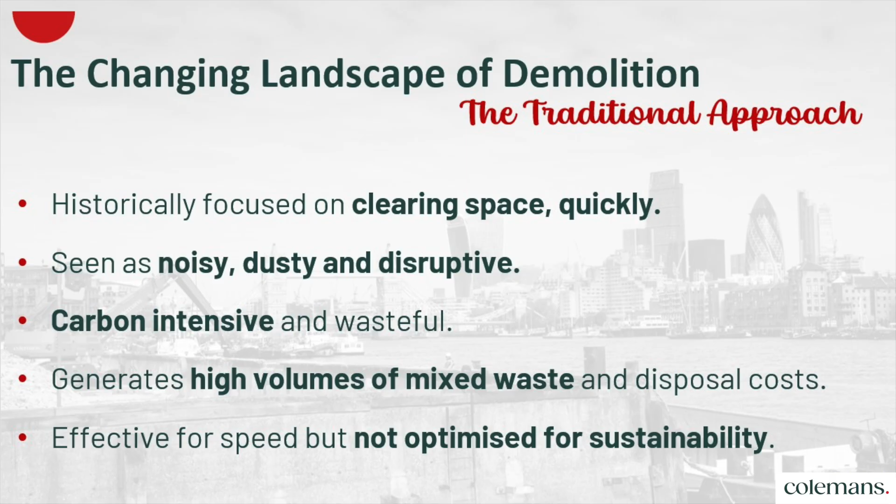Lots of companies are under pressure in terms of their ESG goals and to reduce the embodied carbon. It's true that this is relatively new, and therefore a lot of companies, including ourselves, are struggling and find it difficult to understand how we can actually have an impact. So we're hoping that our experience will help people understand that and give them support through this journey.

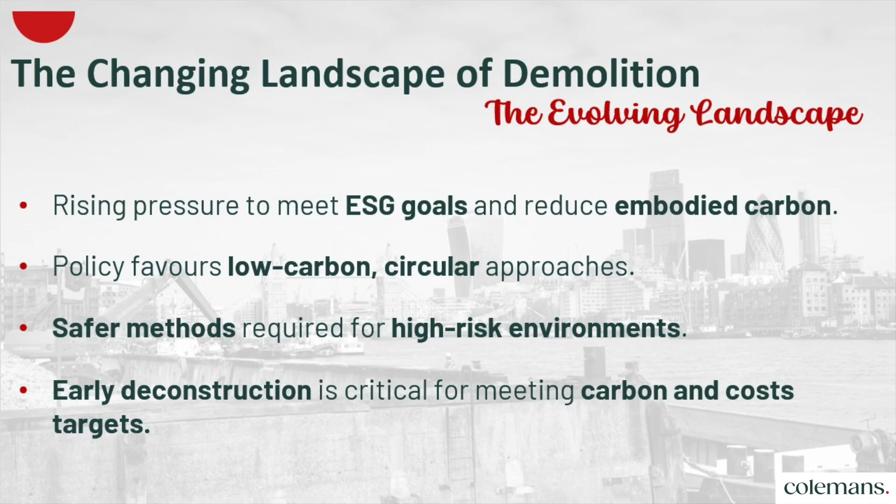So why is it important? It used to be health and safety that was agenda item number one. We now see virtually every meeting that we have, it's about the environment. A lot of the waste comes from the construction industry, and within the construction industry, 30 or 40% of those emissions come from the energy that's required to produce steel, concrete and cement.

So why must the industry change? Construction generates the most waste. It's the largest waste stream by weight. Recycling is great, and we've come a long way, but it means that we lose the value of the materials as they are. The scrapping of materials and the recycling of materials destroys the embodied carbon. Reusing the material significantly saves that carbon and allows it to be introduced into the new construction effectively.

So last year, our past president for the CIOB was focused on the United Nations Sustainable Development Goals and the impact that our culture has on the environment. And this is a global initiative where we are focused together on how we can help our environment, the people that we live with, to provide a safer and more healthy way to live our lives.

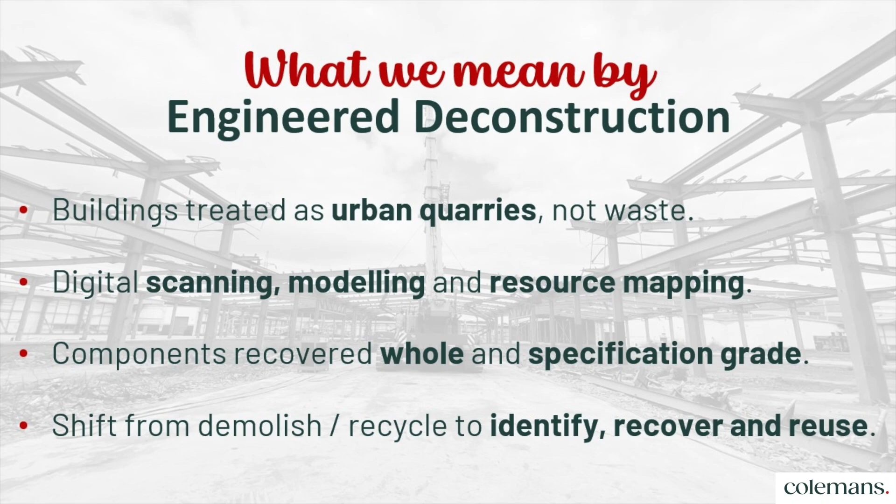In doing so, because it's an engineer-led focus, what we find is that the safety and quality of the outcome before, during and after is of a far higher standard than what we've historically been used to. We get more value out of the materials and therefore save project costs, and we're able to introduce innovation and technology into our processes and procedures.

So unlocking the value, particularly with steel, which is the focus here, historically we scrap material, we cut it into short lengths, we load it onto trucks, it goes to a port, gets shipped abroad, smelted down, reprocessed and brought back. That is hugely energy wasteful. It's not smart, and there are better ways of working.

And having said that, this is not a new thing for the demolition industry, but it is something that lost its focus and is now something that we're trying to bring back in and get people to focus on. It allows us to de-risk the projects because it's an engineering-led process. We're able to actually assess what we're doing and have good collaboration amongst the design team.

And as I said, the operational efficiency, we found that the work is better planned, it's slicker, and the program is more deliverable, and the objectives and the outcomes are closer matched. We always get asked, okay, what impact does this have? We do need to be involved a lot earlier in the process. We find that if we're not, the steel doesn't fit the design, it may be too big. There has to be early engagement.

We need to have visibility of what the outcome is, what the requirements are for the project, so we can match what the steel work is going to be, but there needs to be a bit of flexibility because some of that steel work may actually influence the design. We look to inform the planning process and the procurement and deliver within the sustainability strategy. Keep repeating this point. This is one of the most important points about early engagement. If we're not involved early, we lose the potential to add this value.

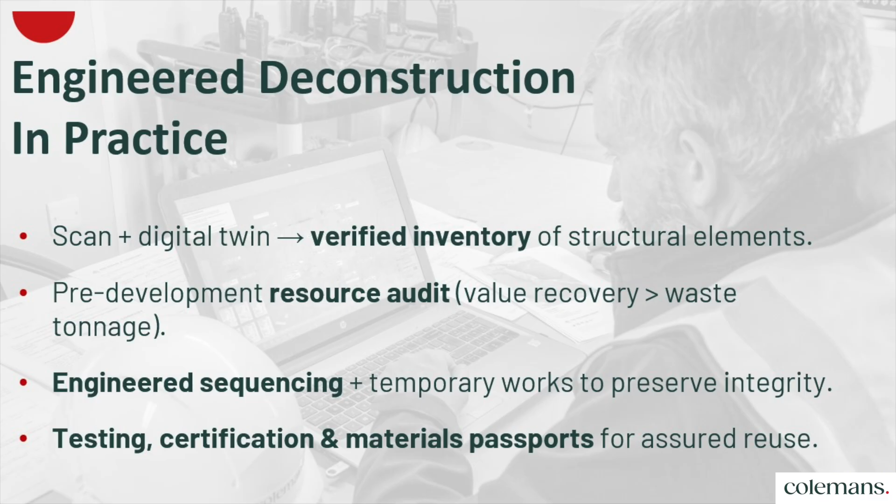This then leads to our engineering team having an engineered sequence on how this building, structure or facility can be deconstructed. And then these materials, once we've taken them down, go into a rigorous process of testing, recertification, and then we have a material passport that follows that.

At the back of this, our business is Emerald Steel, which is a low carbon structural steel initiative we've brought into the business to support our client. Just recently at one of our projects, we've been able to dismantle a large portal frame building and save a good amount of steel from that building. And we were able to hand that over to the client, which then went into the new build.

Just like Mark has said, the key thing for this process of engineered deconstruction, which we are talking about today, is early engagement. This gives us the opportunity to engage and collaborate with the design team to bring these materials into their plan. It also helps us, for instance, with the steels. If what we've had through our inventory is not able to fit into the design, there is ample opportunity to look at the steel members, and the design engineers can then see how this can fit.

We then have the digital mapping system through 3D scanning and point cloud evaluation, which helps us transform this scanning data into a 3D drawing. What the 3D drawing does, which I'm going to talk about in the next slide, is give a clear representation of what the building is. We are then able to identify on these drawings what material or what steel is suitable for reuse.

And then we get all this data together, prepare an inventory or steel takeoff, which we then issue to the client. This is then verified through the British Standard steels data sheet to make sure that all the steels we've taken down or identified in that building meet the standard.

On this slide, you can see there is a physical verification of every material that comes down from the building. On the top right-hand side, that is an in situ hardness testing, which we have to do on every material just to make sure it meets the standard.

In terms of storage, when we've taken this down, we've put the materials in such a way that we do not tamper with the material's integrity. You could imagine a situation where steels are being moved about the job, with damage to the flanges or to the web, but through our sequencing and engineering planning, we've been able to make sure that these materials are stored properly.

This is a typical example of the point cloud data that we get from digital scanning. Like I said, this then transforms into software like Revit. We are then able to produce a 3D model drawing that identifies what steel is there, what section sizes, the profiles. We also put up color codes just to make things easy and presentable.

Like what you see now, the green color shows this steel is salvageable or reusable. And then this transmits to the guys on site, who look at this and are able to identify it physically on the job.

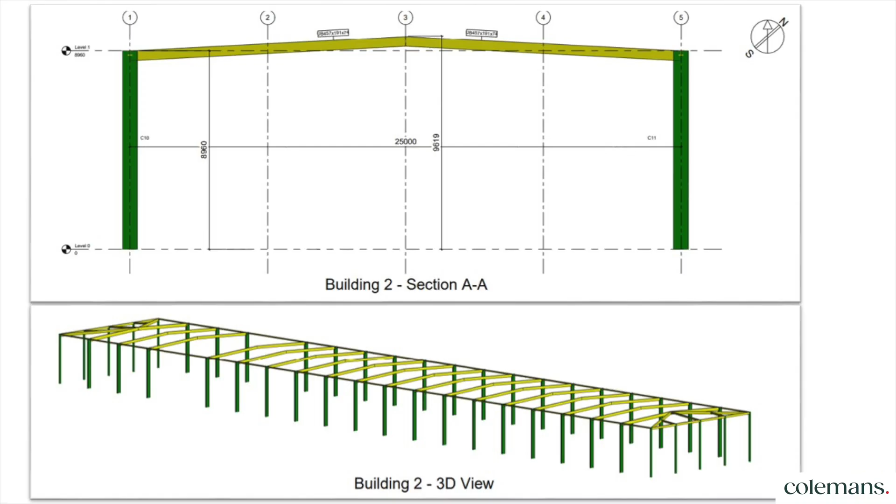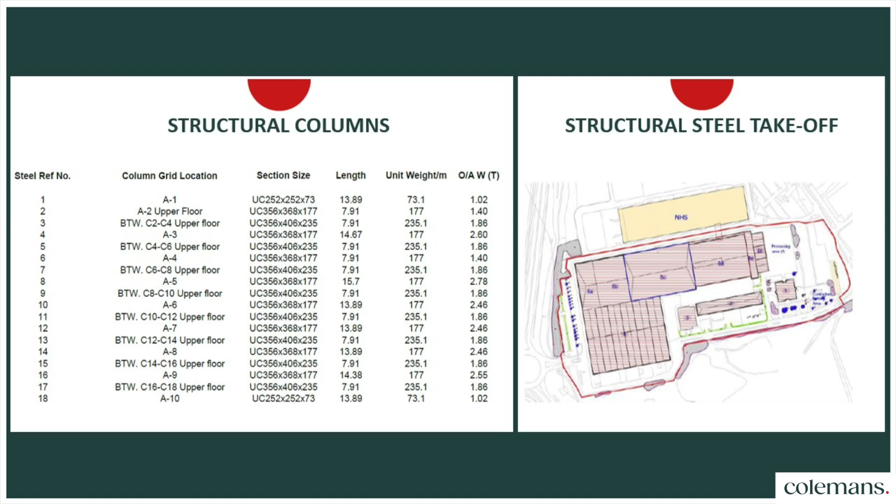This is also a typical example of the inventory or the stock we take from careful scanning and modeling. We then produce all this, and like I said, it forms part of the material passport at the end of the job, which we then hand over to the client or whoever we are working with.

So from a carbon lens perspective, we are all aware producing new steel or virgin steel represents the highest embodied carbon. Recycling then drops down a bit, but if you look at the process of recycling, it's still energy intensive, which is not the best. But when you look at reuse, it is a more sustainable path to take.

So this takes off remelting that material or steel, remanufacturing it, and then it reduces the transport emissions. For us, one of the things that we've tried to consider in terms of transport, so across the country, we have hubs close to where we work, so we don't necessarily have to transport these materials long distance. So we try to make sure all that fits into the carbon reduction we are talking about. So materials are then moved into hubs not far from the job, and that reduces, when you've done the carbon accounting, that data of carbon emission.

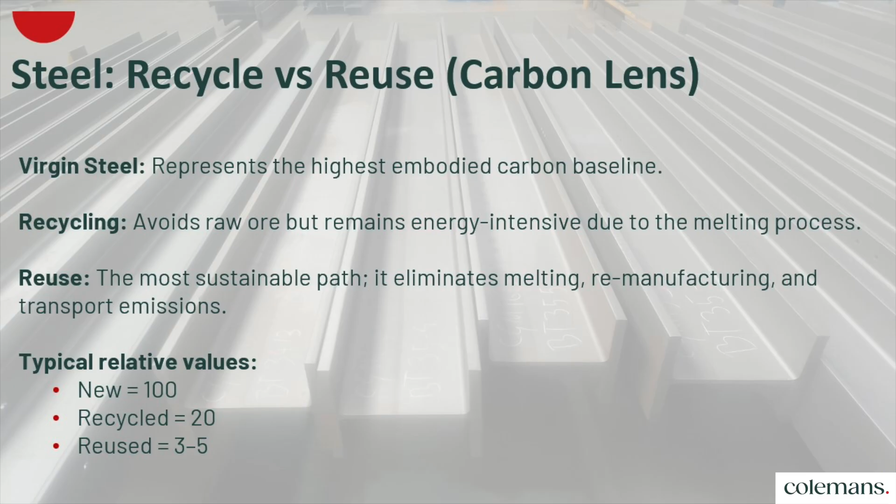Thank you. So this is the project I was talking about earlier. It was a 90,000 square meter portal-frame building in South Wales, which we deconstructed for one of our clients. We had 3D scanning done on that job, and that then produced the BIM models, 3D modeling for our client. And with this model, we were able to assess 4,500 tons of structural steels, which were physically identified on the job for reuse.

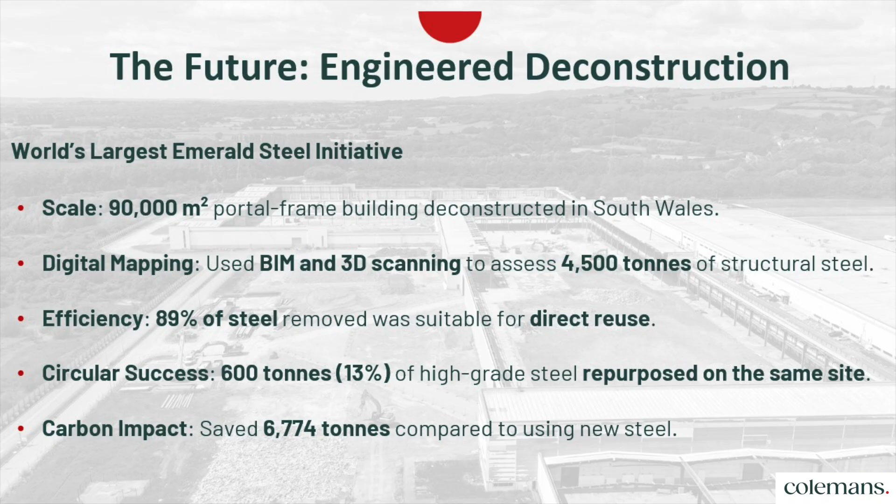In terms of efficiency, 89% of these steels were removed, taken off site, refabricated, and then put back into the building for reuse. 600 tons were clearly repurposed for the new build. And that way we were able to save about 6,700 tons of carbon compared to using new steels on the job. So comparing traditional demolition with deconstruction, the bigger picture is embodied carbon savings. So the true value of deconstruction is found in the reuse of structural materials.

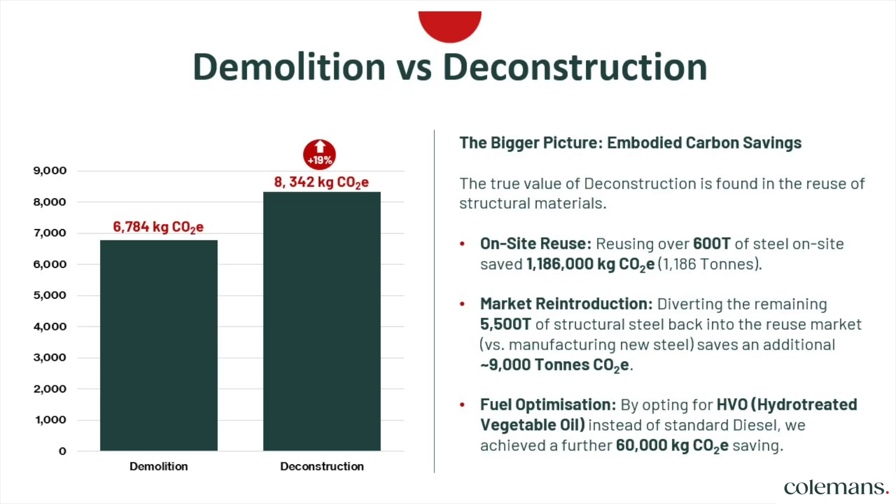Just taking a cue from the job I've just talked about, on site, we were able to reuse over 600 tons of steels. And from that same job, we reintroduced over 5,000 tons of structural steel into the market through our supply chain and different stakeholders we work with. And that was an additional 9,000 tons of carbon saving. And through fuel optimization across our fleet as a business, by opting for HVOs instead of standard diesel, we've been able to achieve about 60 tons of carbon saving from that as well. So you could see we are not just talking about engineered deconstruction, but we've tried to bring that as a core practice in our business.

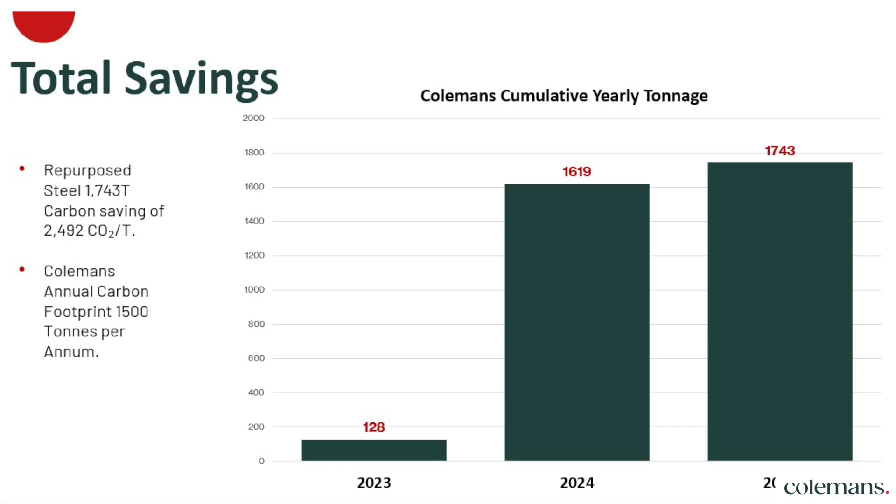So the embodied carbon savings per ton, as we all know, for virgin steel is about 1.9 tons. For recycled steels it's 1.5. But if you look at repurposed, that has dropped drastically. So it's an average of about 0.07 tons of embodied carbon for repurposed steel.

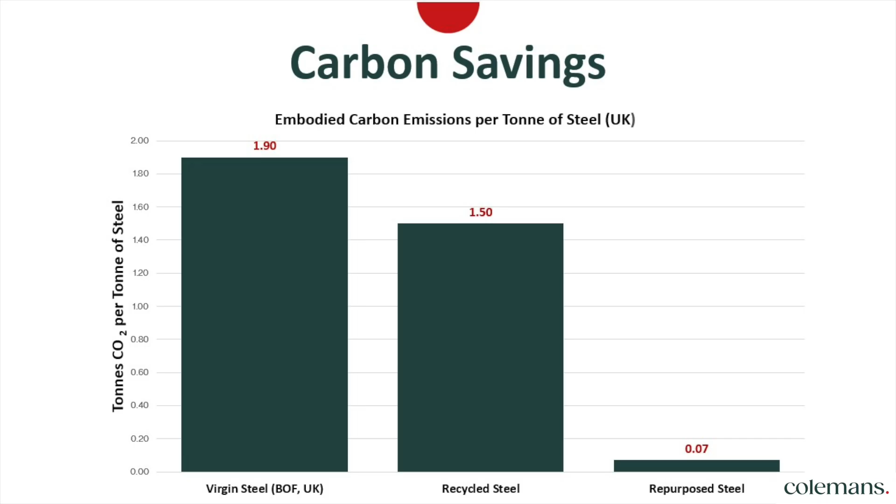So the key success for us, practically, for this scheme for Emerald Steel and deconstruction is early involvement. Mark has said that before, and this is key. It is vital. It is critical. Early involvement is essential to engineering reuse of materials. If we need to have that efficiency, we have to be involved at the start of the job.

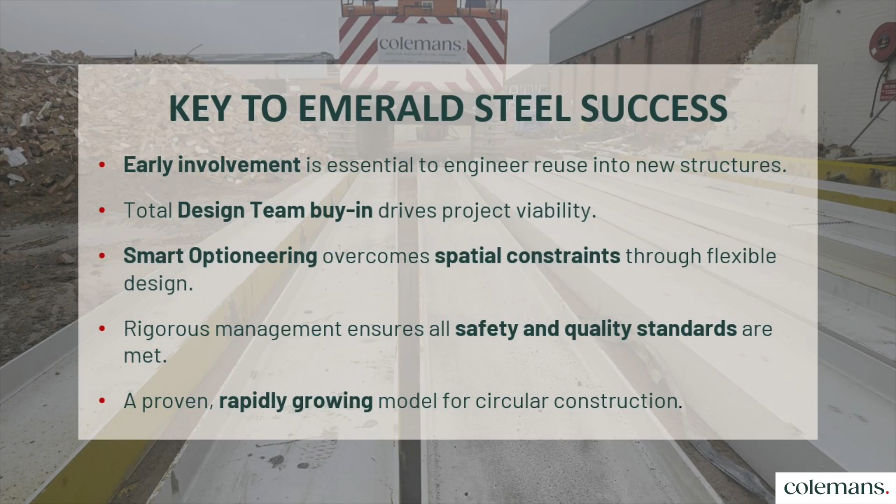That would then lead to the design team buying into the idea or the plan, because most of the time you could have people sitting back to say, is this viable? Can we go on? But when we get involved from the start, that gives everyone in the room ample opportunities to talk about this, look at the benefits and how we can get things moving forward. Talking about designs, technologies, we've used different technologies to make sure that we get the right data. Rigorous management of these processes will ensure safety and quality standards as well. And this will also lead to a rapid and proven model for circular construction within our industry. So the video you're about to watch is a high-level summary of this project I'm talking about.

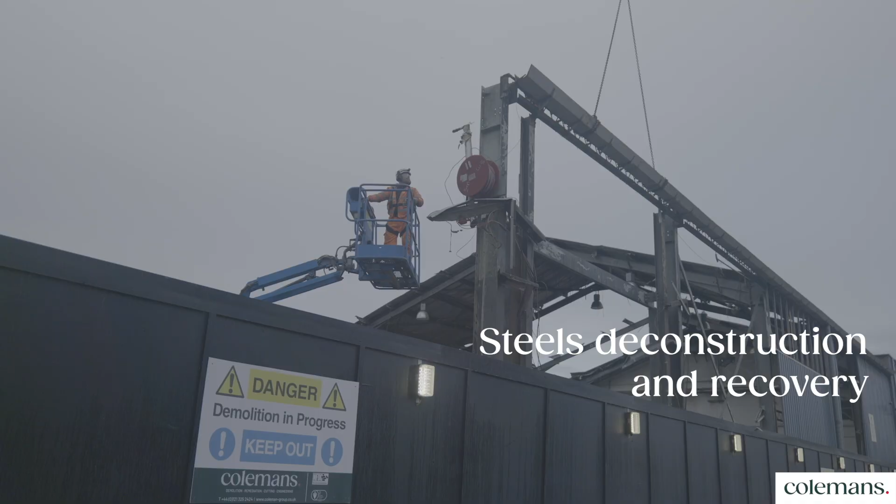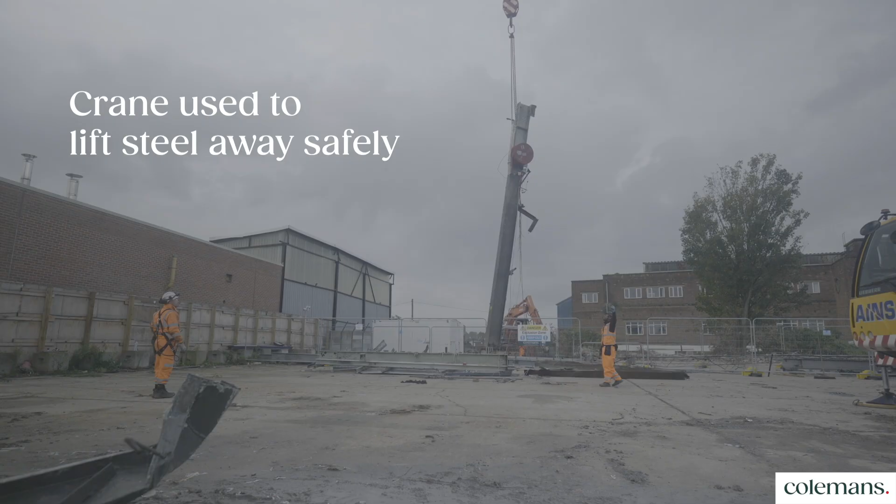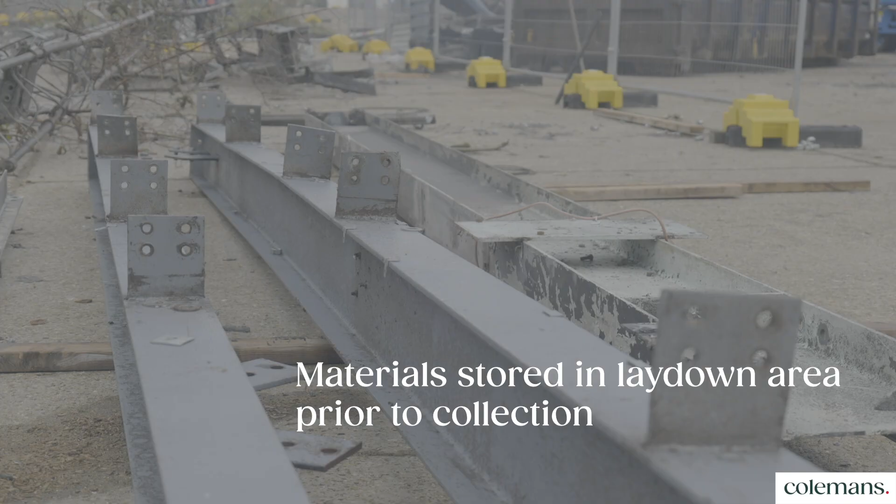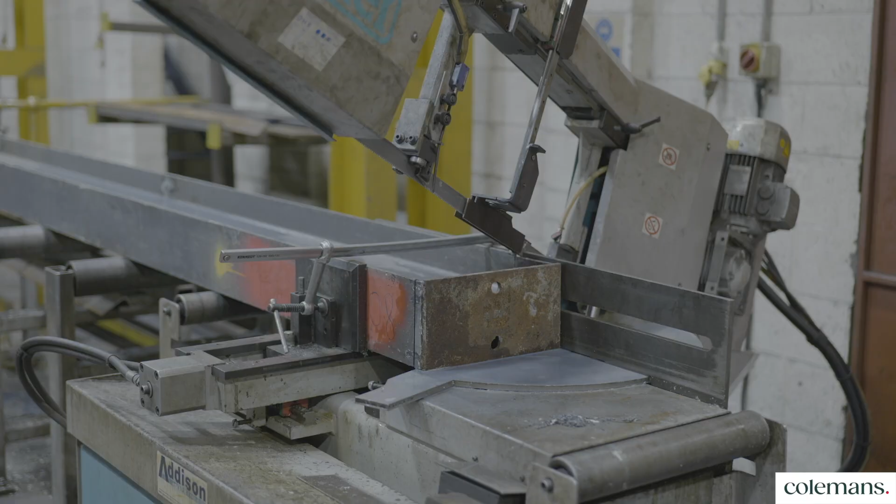So for this project, we were on site with a global tech giant, and we looked at the project and said, look, are you thinking about reusing this steel? And they said, no, it's too risky for us. So what we set about doing is taking 2 sites that we're working on in London and doing a proof of concept. And what you've seen is us taking down the material, re-engineering the material, repurposing it, and documenting each and every step of what we were doing and demonstrating, but also learning along the way to make sure that we could comply with what they called the nuclear standard.

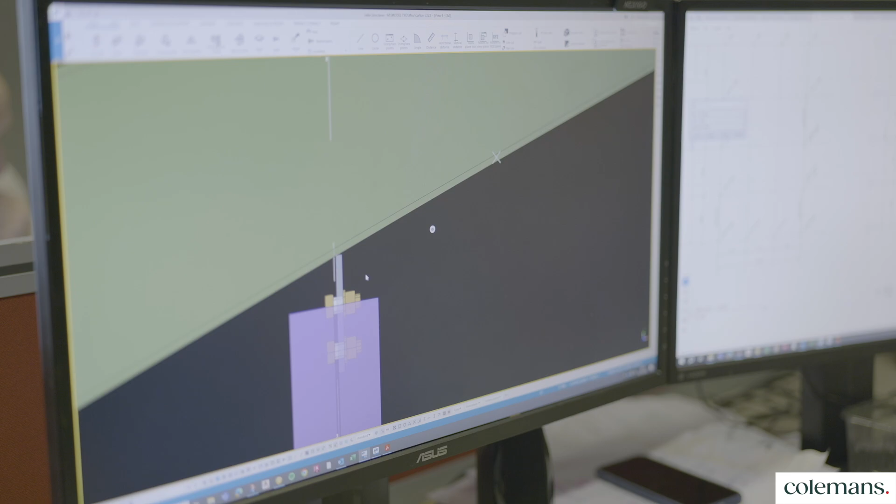We had to build, if we were going to repurpose this material, to comply with nuclear standards, which is the highest construction regime that we're aware of. And we took the buildings down, we repurposed them.

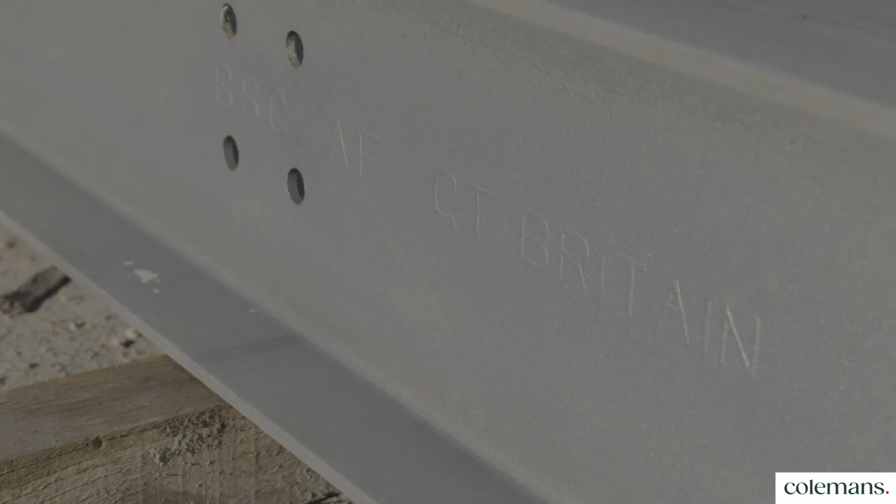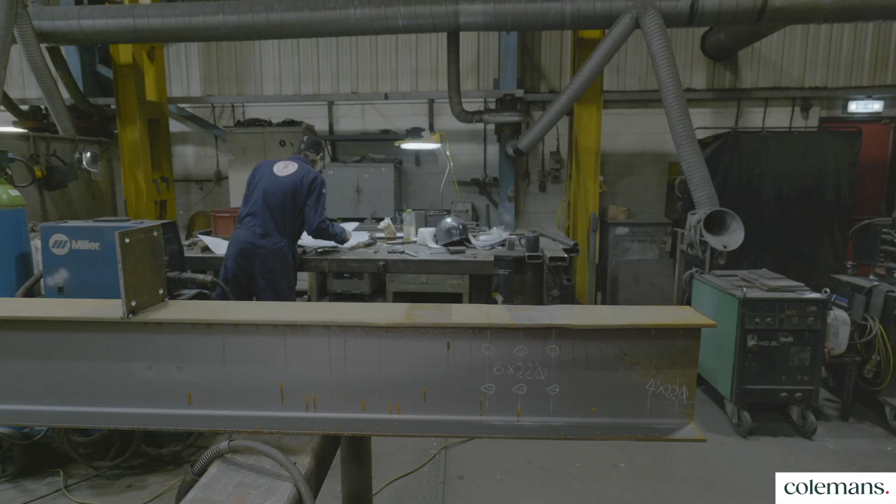We're doing a wellbeing project in southwest Kerry in Ireland, and we went as far as actually putting the structure up, building the building, documenting everything, and making sure that we were then able to talk to our client from a position of authority and experience and say, look, this is what we've done. We've listened to you. You're concerned about the risk. This is how we've been through the process. This is the learnings that we've achieved.

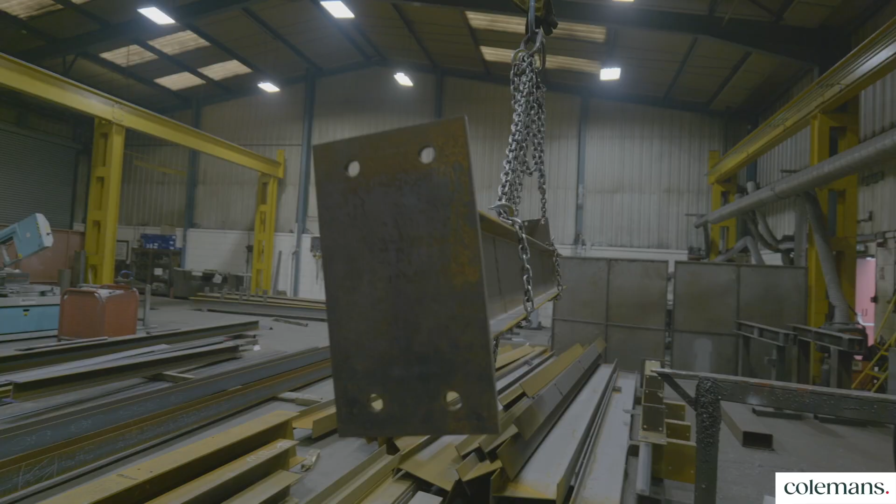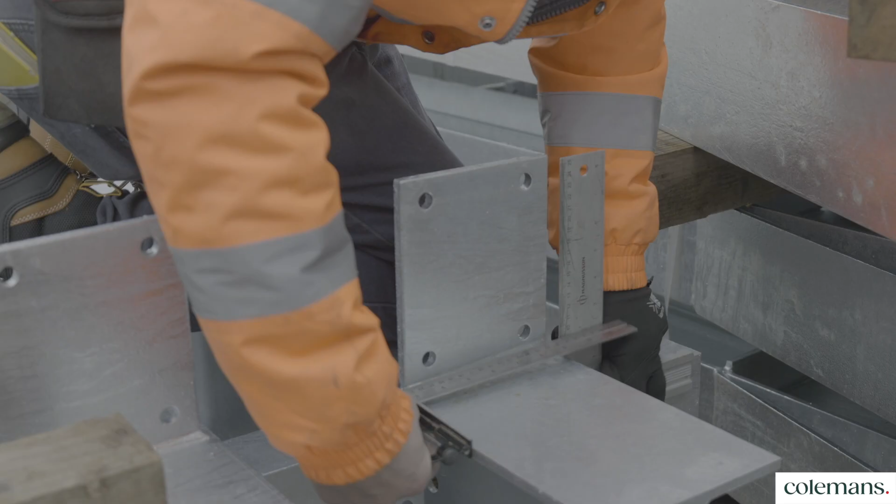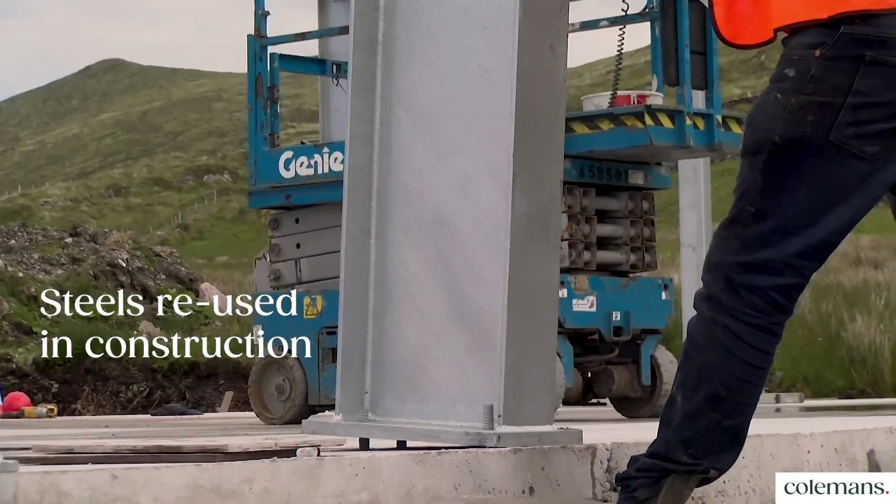And we really do believe that there's a huge carbon saving to be made on your project by allowing us to deconstruct the material, wholemeal, piecemeal, re-engineer it, take it through all the quality standards, and then reincorporate it, reintroduce it into the new construction of your data center. You'll see here that this is the new steel. When I say new steel, repurposed new steel. And this is the site here in Ireland where we've shipped it over there.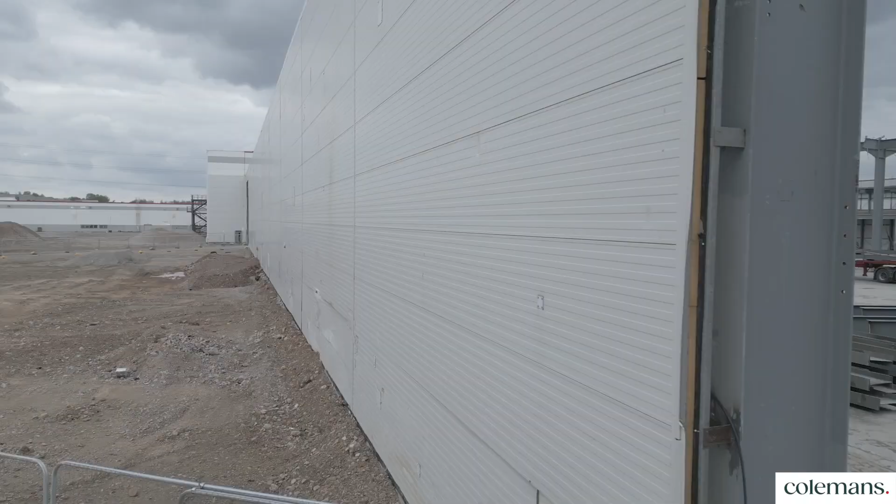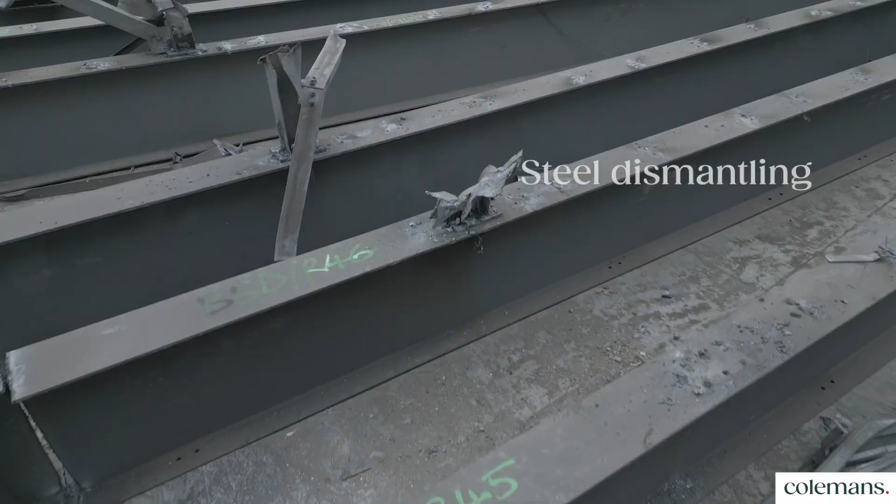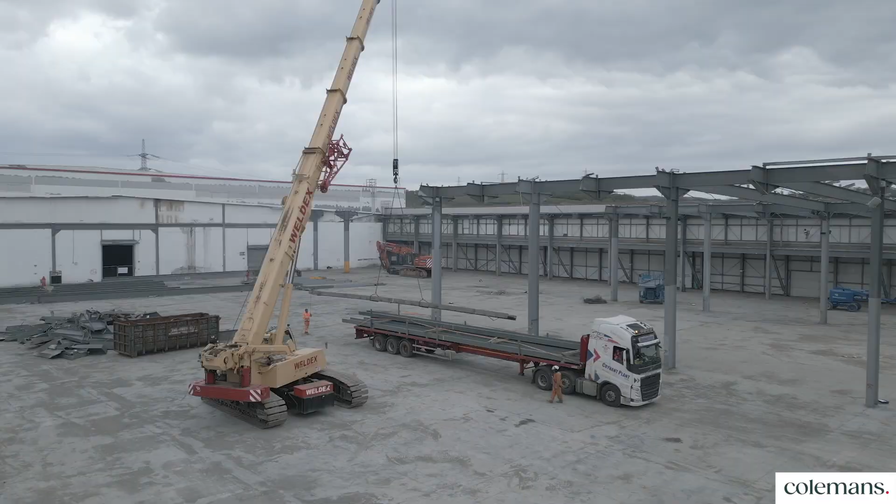You'll see that this is a typical portal frame building, one which we can all recognise. This is the deconstruction process, and as you can see, it's very clean. It doesn't really look like a demolition job. Steels are being dismantled. Loaded up, and the re-engineering, again with the carbon footprint in mind, was carried out by a local supply chain manufacturer and engineering company.

So we always get asked, does it cost more money? Will it add more time to the program? And the answer is, if it's considered late, yes, it will. But if it's brought into the design early, it won't. It will be more dependable. You will realise the carbon savings. And in our opinion, you have a safer, slicker way of working. The cost per element can be more, but that has to be adjusted against the cost of the new steel. It's program neutral. We've not found that it takes any longer.

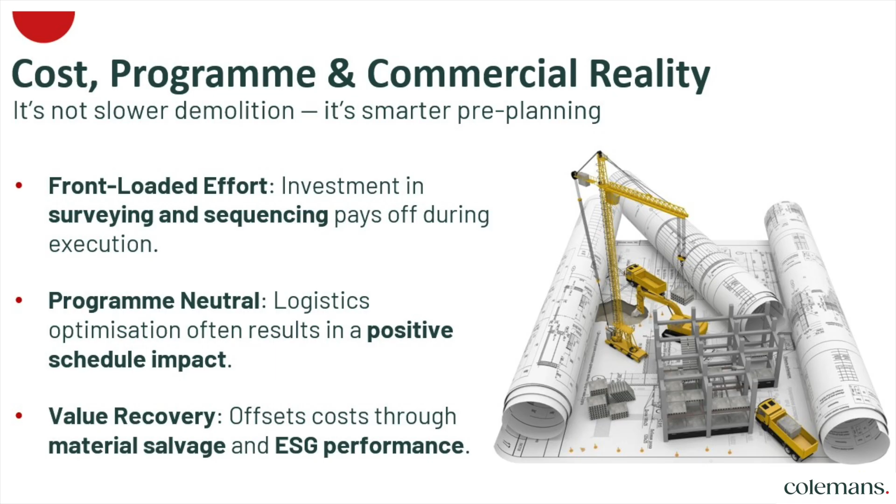And the big win here is that not only are we doing the right thing, but it's helping clients achieve planning permission. It's helping big organisations that have to submit data on their carbon footprint reduce their carbon footprint. So we mitigate the risks by it being engineered, tagging all the materials, engineering the solutions, and designing our methodologies around that. So it's absolutely crucial that we all learn, right, and we all collaborate.

And to do that, we don't just do it with our clients and our supply chain, we explore the market, but we also engage with universities, and we're involved in multiple PhD projects, along with knowledge transfer partnerships, where we're actually investing in innovation and research and development. So it's really good because it brings the team together. We're all aligned around the right thing to do. We're all planning. We're all informed. We're all communicating. We're able to invest in innovation and technology. It gives better predictable outcomes and reduces client exposure, and we're managing expectations from the onset.

So how we see this evolving is clearly technology is a massive part of it. Automated materials inventories using AI to work with the scans that we take out on site. Standardizing materials passports and digital product identities, focusing really on the quality process. So the removal is key, so we minimize damage, the testing to ensure that it is fit for purpose, and then the time that's needed to re-engineer it into the project.

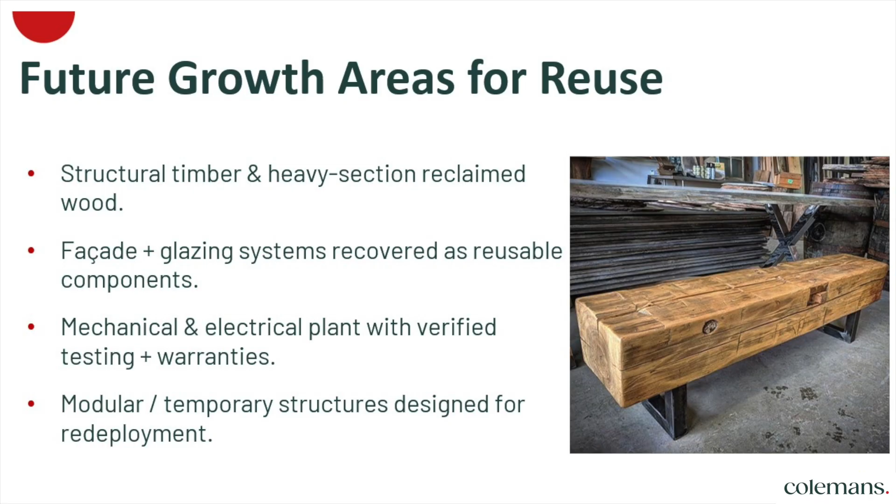So actually looking at something and saying, okay, what can we use that for? And typically a lot of the steel that we're repurposing, we're now introducing into secondary use for temporary and permanent works. We really believe that demolishing buildings creates more waste than it needs to, and that deconstruction is the way that we create an asset that is able for us to save carbon being emitted into the atmosphere.

So we're shifting from niche recovery to a standard material supply chain. The supply chain is absolutely crucial to what we do. You've seen the work that we're doing with the digital twins. That feeds into a digital footprint that works really well with materials passports. And we are really focused on establishing engineered deconstruction as the primary method within the demolition sector for decarbonisation of our industry. There are other wider benefits.

Of course, it's good for our planet. I've got 3 kids. They're now grown up, but I look at the life that they're going to live in the future, and that's important to me, what happens to them and indeed their children. It does reduce long-term costs. There is grant funding available and private investment initiatives, reducing our tax bill via research and development. It's really good for the culture of the industry and the people that we employ and attracting new talent.

And we believe that with carbon taxes coming, in the same way as cigarettes that are bad for your health, the smoke that comes out of it, it's the same as what we do in our industry. And with this tax coming, it's going to be a heavy burden to us. And we believe that for carbon conscious companies, it's not just about doing the right thing, it's about winning in business.